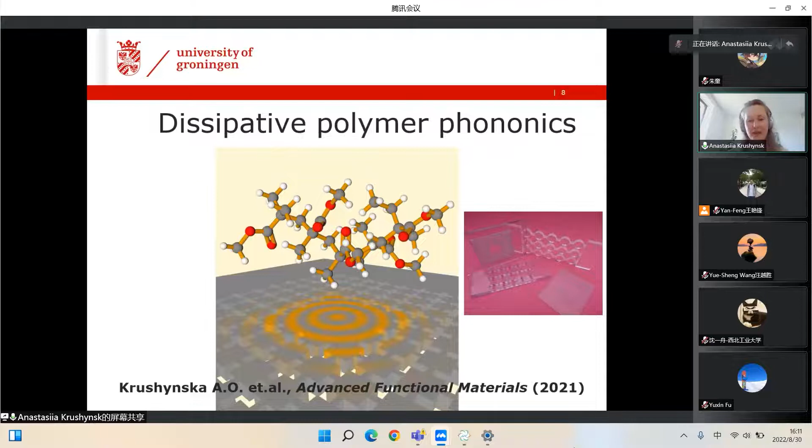Along similar settings, we also worked on the analysis of wave dissipation in 3D printed polymeric phononic structures. On this topic, we worked together with the Philips company. This company produced for us 3D printed samples, which we analyzed starting from the microstructural level, using scanning electronic microscope, then also analyzed different material characteristics, and then introduced different wave manipulation mechanisms.

So these are phononic band gaps, locally resonant band gaps, inertial amplification band gaps. We studied how the viscoelasticity of 3D printed polymers influences the wave attenuation and wave guiding properties in these materials.

Okay, after these two examples, we go to the applications, and applications in my group are currently analyzed not in the phononics field, but in the field of mechanical metamaterials. So here you see an example of the work of current PhD student Jiaoheng Zhang. He works on automated design of programmable mechanical metamaterials.

In his recently published work in APL Materials, he developed a new mechanical metamaterial configuration. So here you see an example of a metamaterial structure, which can be tuned by changing two parameters: the shape of this curve and the thickness of the elements, to perform a shape morphing functionality.

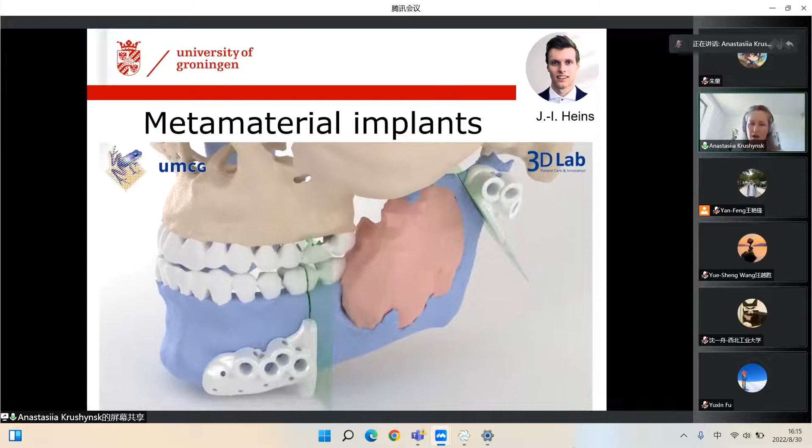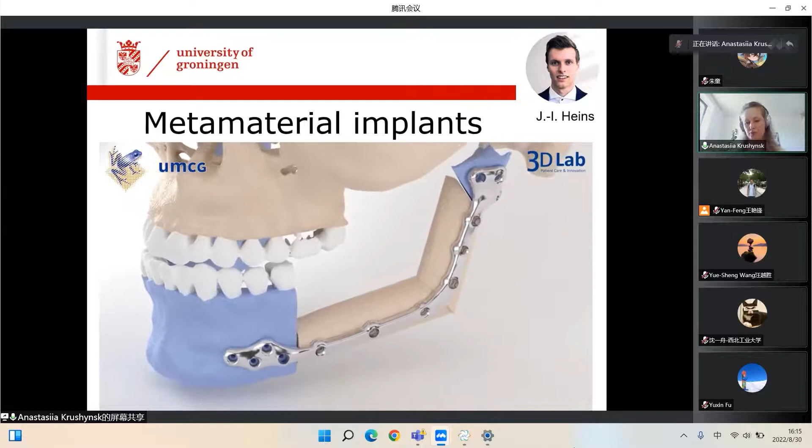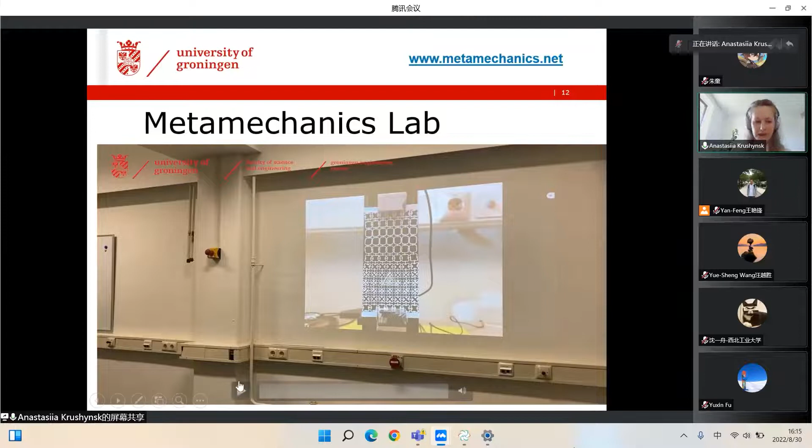Okay, so to work on this and other projects, we also have the MetaMechanics lab. Here is a short video with the setups that we have.

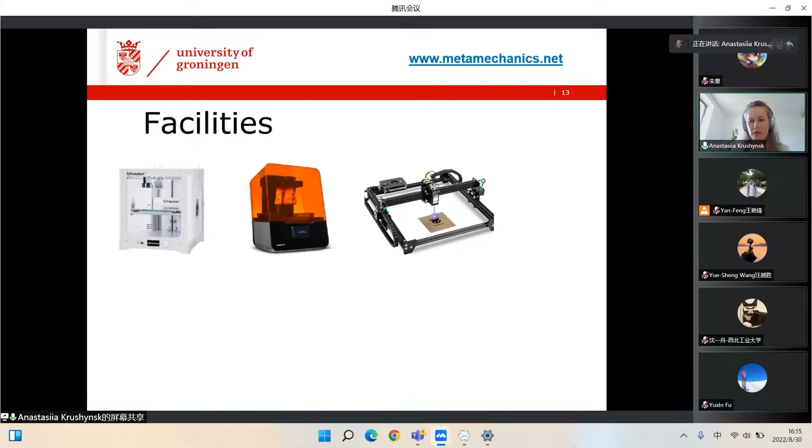Specifically, we have facilities for additive manufacturing. This is an FDM dual nozzle printer, an SLA printer. We also have a laser engraving machine. And to test the manufactured samples, we have an acoustic impedance tube and laser Doppler vibrometer with related other setups like amplifiers, transducers, accelerometers to perform ultrasonic tests.

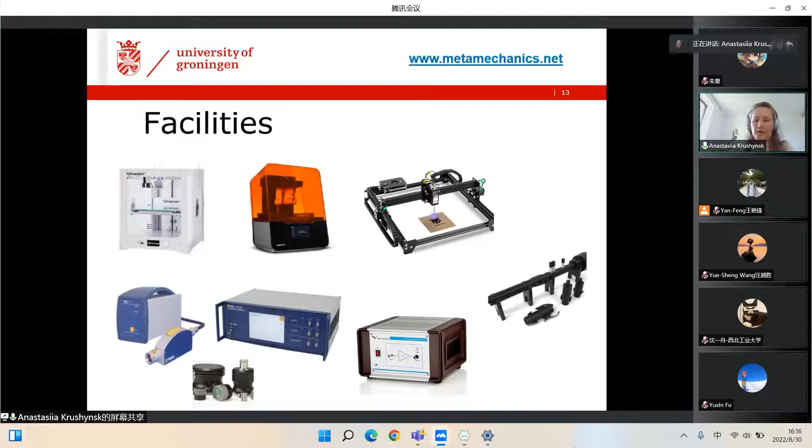To have an idea of the tests that we do, please go to our website, and we also have a YouTube channel with the same name, MetaMechanics. There you can watch videos on possible applications and the tests that we do in this lab.

Okay, so after this short introduction, I go to the main topic. These are patterned flexible wings. It's a short title, let's say, and a longer title could sound like aerodynamics and aeroacoustics of flexible artificial wings with metamaterial patterns. So this topic is not purely on mechanical metamaterials, and it's also not purely on phononic metamaterials because I would say it's on the border.

So that's application of mechanical metamaterials to the dynamics of flight. And we think that we are one of the first people who decided to study this field, which is quite challenging and requires very different expertise than my group has. So that's why it was a highly collaborative research.

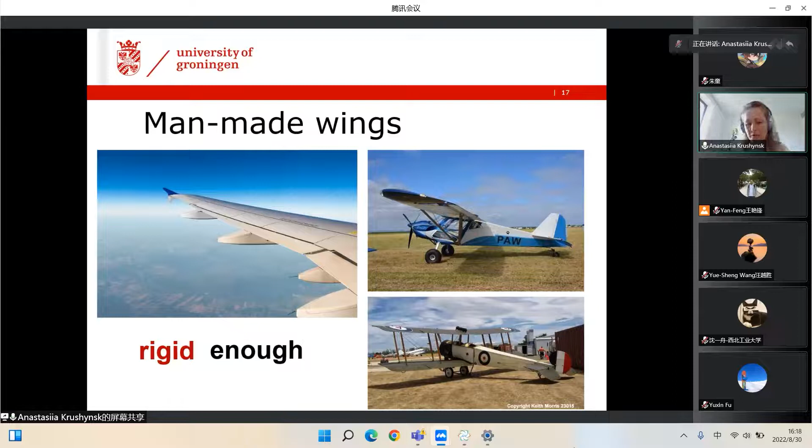However, if we have a look at natural wings, for example the wings of insects, they're quite different. First of all, they're not fully fixed. They can fold, they can rotate, they can flap. Second, they're not rigid—they're inherently flexible. And apart from being flexible, they also have a complex structure.

Just have a look at these examples, and you see that for every insect, the wings are patterned. There are rigid veins arranged in so-called optimized patterns that provide some benefits to insects, and we will discuss these benefits later.

And apart from that, wings are not only used for flight, but they're also used for communication purposes. For example, by flapping their wings, insects can communicate to each other about the presence of an enemy, or they can send a signal from female to male species. So it's inherently complex and multifunctional structures.

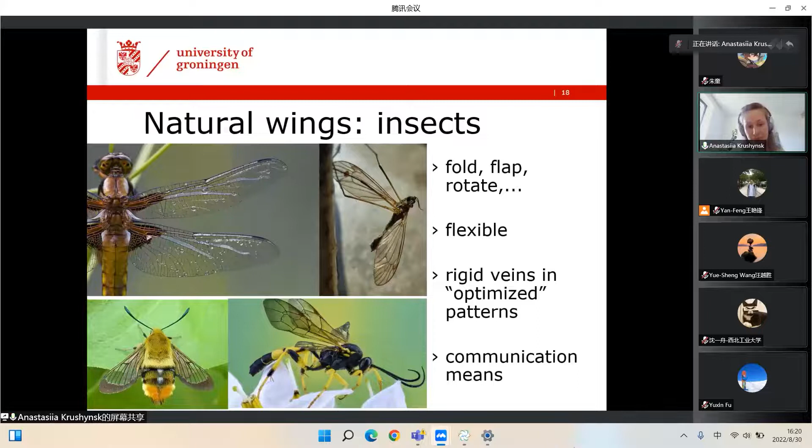Researchers have been interested in analyzing the dynamics of natural flyers like insects for quite a long time. They studied the advantages of flexible wings as compared to rigid wings, and found that having flexible wings is actually really beneficial. Why? Because it helps to save total power for insects.

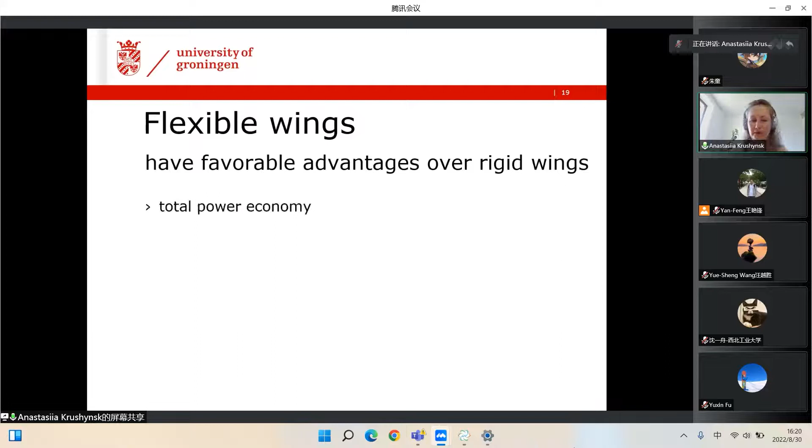Second, it enables the insects to have a high lift-to-weight ratio, meaning they can carry some weight in addition to their own. They also help introduce better control of aerodynamic characteristics during flight, and allow them to be a little bit more tolerant to wind as compared to rigid counterparts.

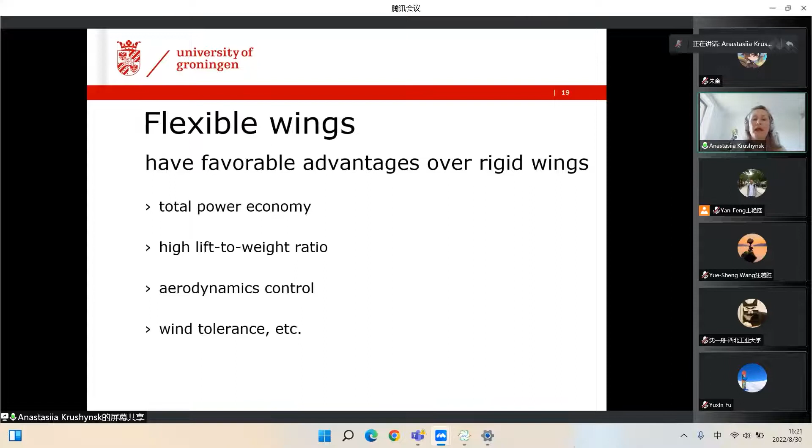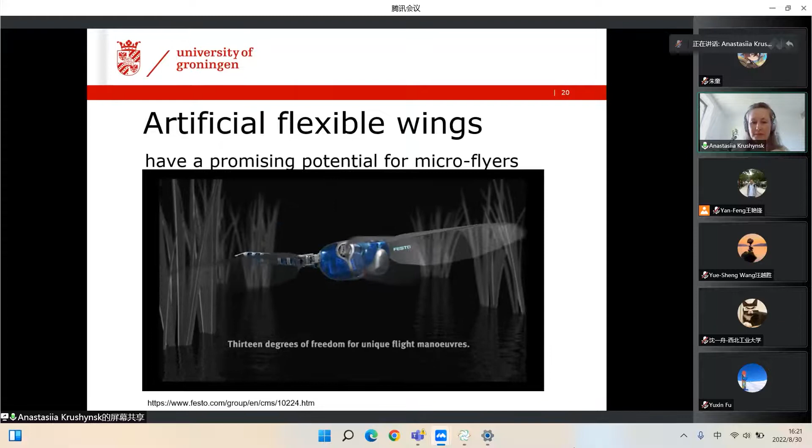So having all these advantages in mind, researchers have started to develop flying devices with flexible wings for quite a long time, and this research continues now. Here I show you my favorite example: a small flying device inspired by dragonfly wings and the dynamics of the dragonfly, fully artificial, fully mechanical.

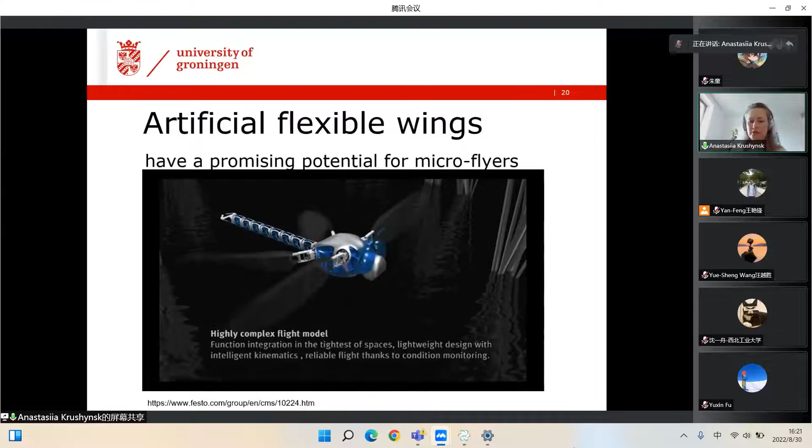You can see now as it slows down how complex the motions of these wings are—they really experience large deformations during these flaps. Besides, you see that even in this artificial setting, not speaking of natural ones, all the wings are patterned. And it appeared, after many studies, that this venation pattern is crucial for flight.

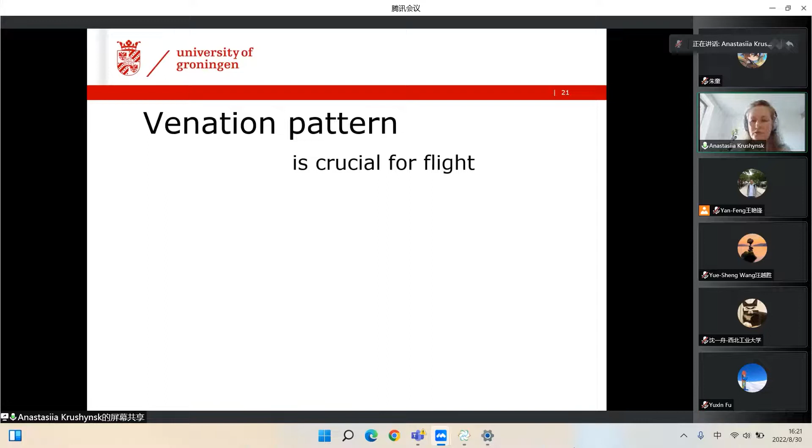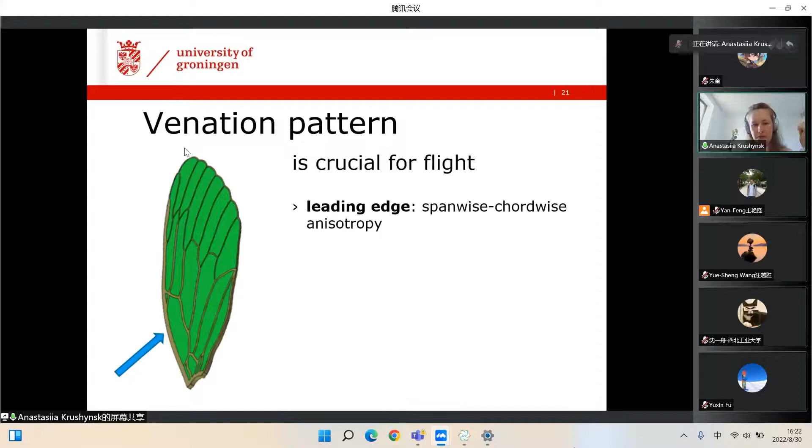Let's have a look at the model of a wing of a dragonfly. In brown, you see the venation patterns—let's discuss it a little bit. First, you can see the thickest vein, called the leading edge, which introduces, in terms of mechanical properties, anisotropy in two directions. This longer direction of the wing appears to be more reinforced as compared to the perpendicular direction.

Then smaller veins introduce so-called local flexible regions. They make the structure of the wing reinforced in certain places while it remains flexible in other places—flexible is shown in green here. After many studies, it appears that this variation in the patterns enables control of bending and torsional modes during the flight, and it's unique for every insect, and also for every specific insect. So it's quite a complex structure.

Besides, we see that the veins have varying width—they are thicker close to the base and thinner closer to the tip. That introduces variation in the stiffness and the inertial resistance of the wing, which is also beneficial for flight conditions. But overall, you see that the structure of this pattern is not simple, not only from a topological point of view, but also in terms of geometric properties. So if we want to describe it, we will really need a lot of geometric values to fully reproduce it.

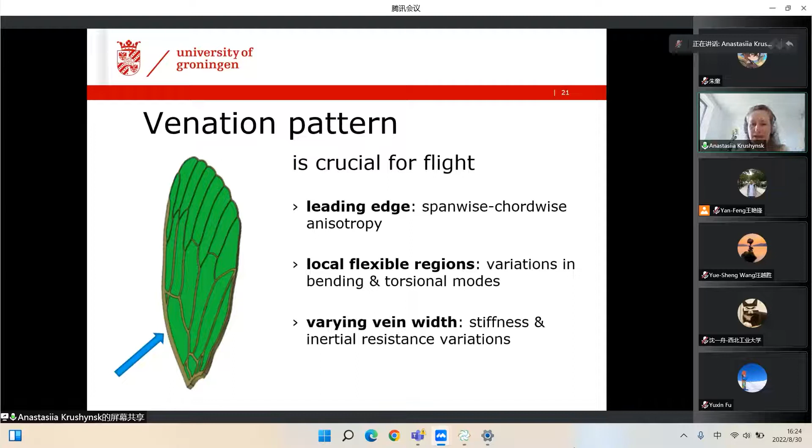And this is one of the major challenges in modeling the dynamics of these wings and reproducing it in artificial wings. So what are these challenges specifically?

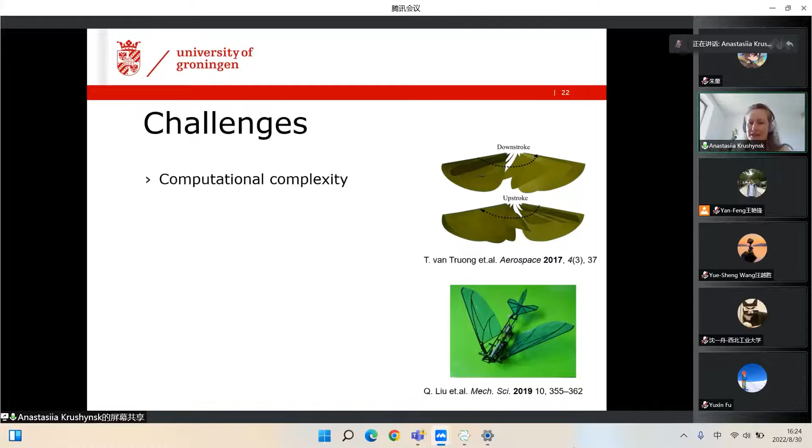That's why, to obtain first insights into the dynamics of wings, researchers try to avoid having patterns. Also, the complexity of the pattern and the difference in materials for natural and artificial wings does not allow directly translating the pattern, because it's really about the relation between material properties and the structure of the pattern. At the same time, looking at insects, we cannot find an ideal pattern, because the variability is so great that it's difficult to understand which ones perform best, or if it's even possible to find the best pattern.

The next challenge of working with artificial patterned wings is the absence or scarcity of suitable materials and technologies. Most artificial wings that try to mimic natural wings are made of very light and fragile airfoils, and there is no unique technology to make them. In most cases these are manual designs requiring a lot of time to assemble, and the fragile material means they can break very easily. Also, the very thin material used reduces load-bearing capability.

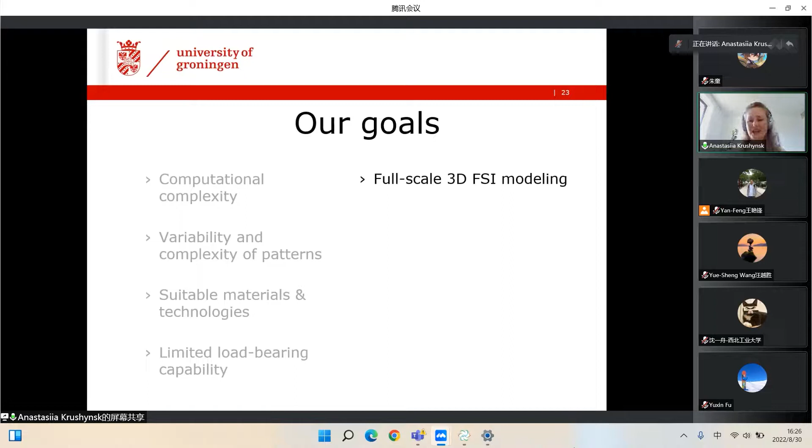So these are the challenges, and our goals were: first, not to compromise on computational complexity. We decided to perform full-scale 3D fluid-structure interaction modeling of the wing dynamics, because only in this setting can we get really useful insights into the dynamics of wings.

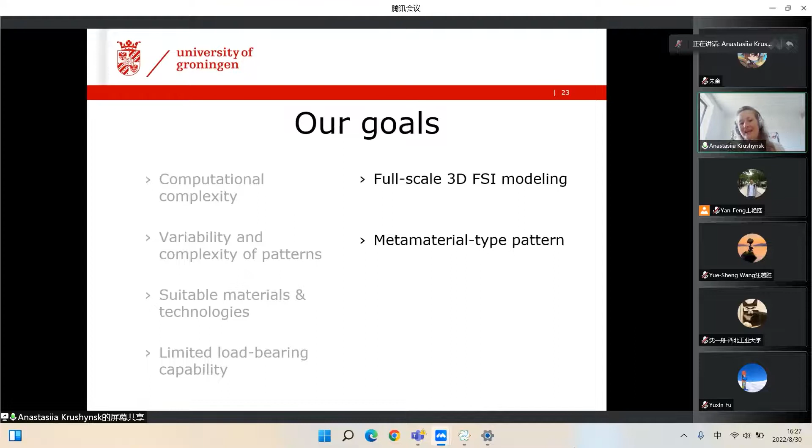Then we decided to step away from the variability of natural patterns and instead use a metamaterial-type pattern. The idea is that metamaterials typically have a few geometric parameters that allow a wide range of mechanical behavior. Having few parameters lets us study how the design of the pattern influences wing dynamics while keeping the design space sufficiently small. So this was the motivation.

To find suitable materials, we decided to explore 3D printed polymeric materials, because 3D printing becomes more and more affordable. We can print flexible materials, it's not expensive, and quite easy to do. If we can make 3D printed polymer wings easily, this may open a nice perspective for improving the design of artificial wings.

Finally, to address the limited load-bearing capability, we wanted to explore resonance flight conditions. Why resonance? Because at resonance, all characteristics are amplified, including lift. There are actually natural insects that fly long distances benefiting from resonance effects. So if it exists in nature, why not exploit this approach for artificial wings?

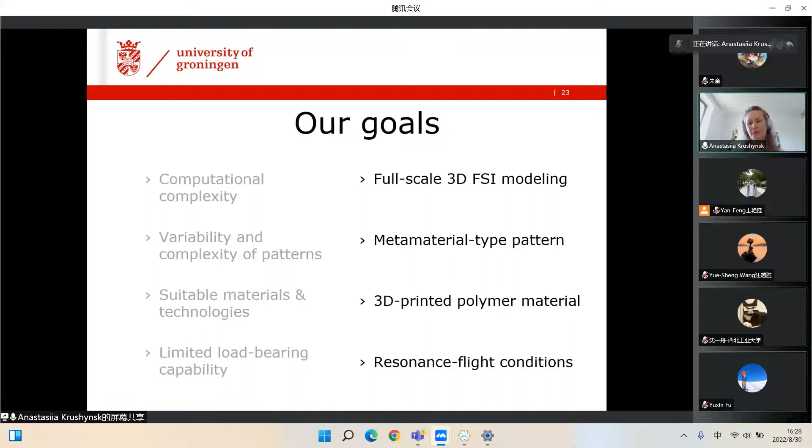So with these goals in mind, I will introduce the model that we created, how we tested it, and how we performed the modeling. And we start from the model.

Our wing model is inspired by that of a dragonfly wing. Specifically, we took the overall shape, preserving the shape and the external vein of its analogue. To keep a controllable area for the metamaterial pattern, we preserved the external wing border on all sides, so basically we cover only the interior of the wing with the metamaterial.

So in this model, we end up with 5 design parameters: the pattern area for the wing pattern, which is P, then out-of-plane and in-plane thickness of the elements. And to have a little more design freedom, we introduced scaling parameters along the X and Y axes, to be able to make this pattern anisotropic.

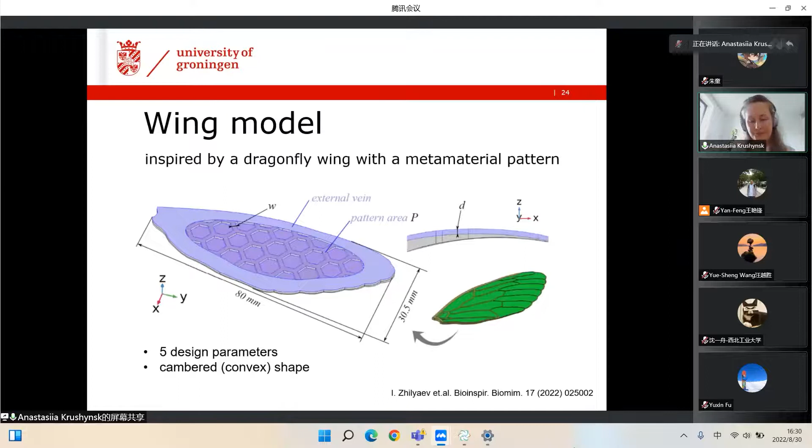Then we decided to check if it is possible to produce these wings. For that, we used a dual nozzle 3D printer and flexible TPU material made from recycled polymers, and we ended up having it printed.

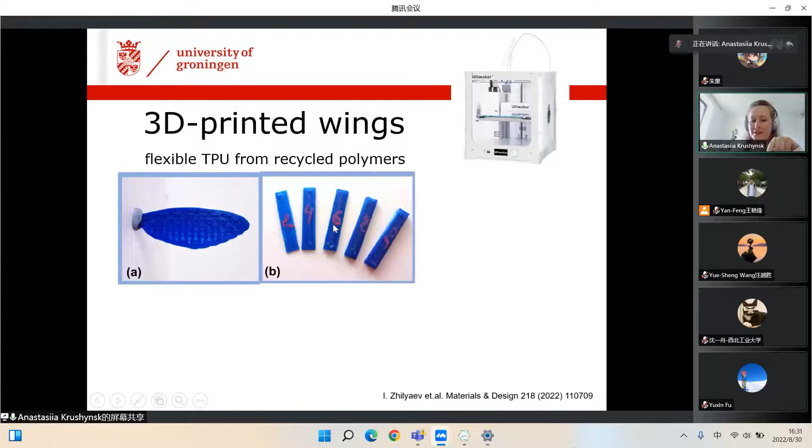To give you an idea how this flexibility works, since we're not in a real audience but online, here is a demonstration. We printed several samples with different out-of-plane thickness: the first has 2 printed layers, the next 4, and so on up to the last with 10 layers. This number of layers is used in the design of the wing.

We fix one end of the sample, and the other end is loaded with a static mass. This is not to test anything, but just to show how flexible or rigid the material can be.

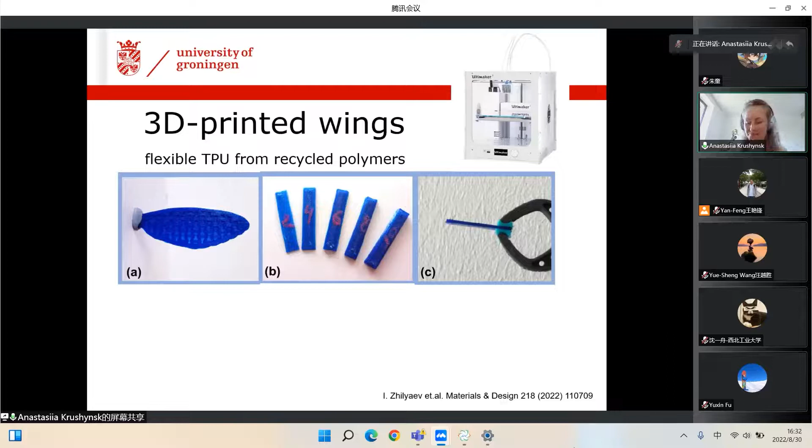With 2 printed layers, you see the material is very flexible, and at the same time it exhibits fully reversible deformations. When we remove the mass, it returns to its initial position and shape. But as the number of printed layers increases gradually, the material behaves more and more rigidly.

This allows us to make a wing model from one material, the TPU or recycled polymer, while controlling the rigidity and flexibility by changing the number of printed layers. This is something we also see in nature, because natural wings are made from a single material, chitin, which is differently arranged in the veins and in the flexible parts. We were very happy that man-made material can have analogous mechanical properties.

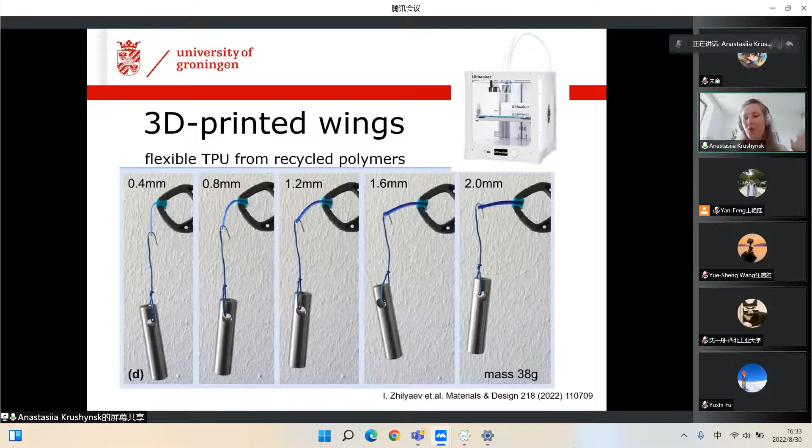Having printed these wings, we wanted to understand how accurately we can model them. This is essential because, as I said, we use a low-cost 3D printer, so the printing quality isn't very good, and it's important to know how much inaccuracy is introduced due to the manufacturing process.

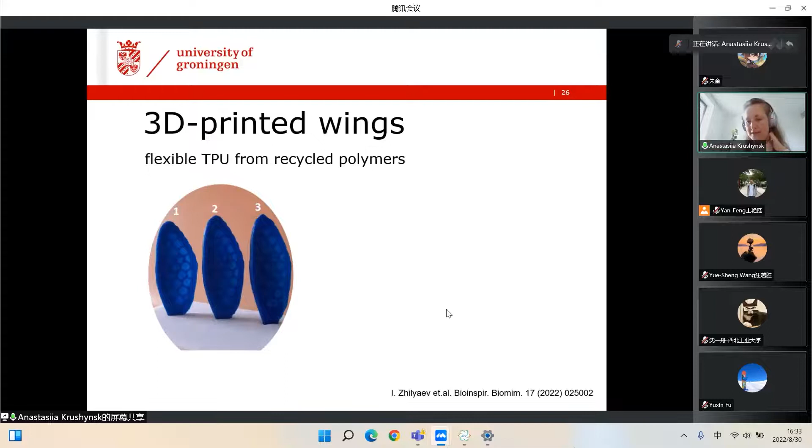For that, we tested the dynamic characteristics of the wing. Specifically, we fixed the base of the wing in a holder and excited it from one side manually with a hammer. At the other side, using a laser Doppler vibrometer, we measured the free vibrations. Basically, we hit the wing, let it vibrate, and then measure the vibration response.

We were very happy with that, and then decided to check the next property: are our wings robust enough to survive resonant type excitation?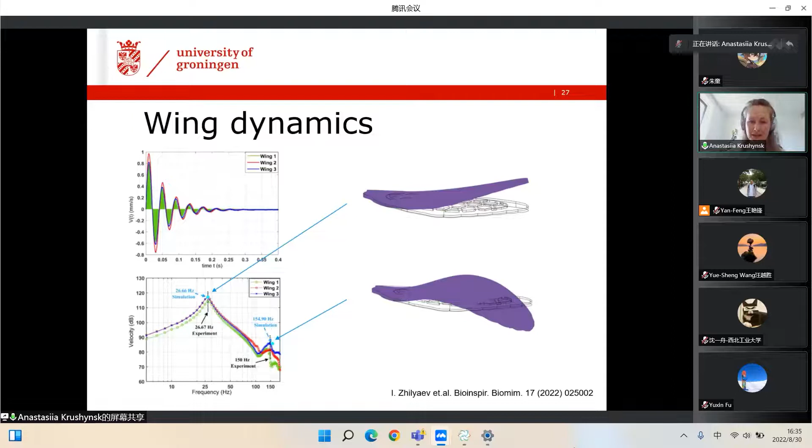For that, we used the forced excitation test. I won't run this video since you can't see it well, and I noticed when I ran it my presentation is broken, so the PowerPoint doesn't work well with this video, sorry for that. But the idea is the same.

Instead of manual excitation, we used a shaker, exciting the wing for different periods of time and measuring the forced excitation response. We excited it for 5 minutes, then the next round for 30 minutes, and then the same wing for 90 minutes. After each forced excitation experiment, we performed a free excitation experiment to check the eigenfrequency.

The idea was that if there is damage within the wing, then the eigenfrequency will change its value. But as you can see, after even 90 minutes of excitation, the eigenfrequency value is preserved. That means there are no essential internal or external damages in the wing, and in total, the excitation time exceeded 2 hours. That means the lifetime of the 3D printed wing is comparable to that typically used for microflying devices.

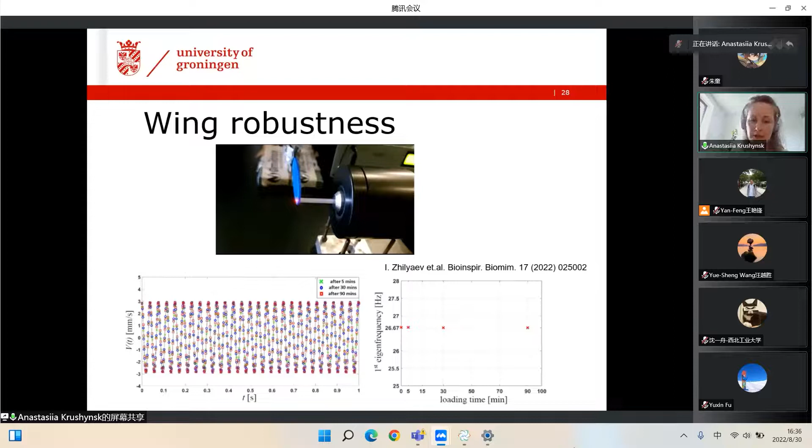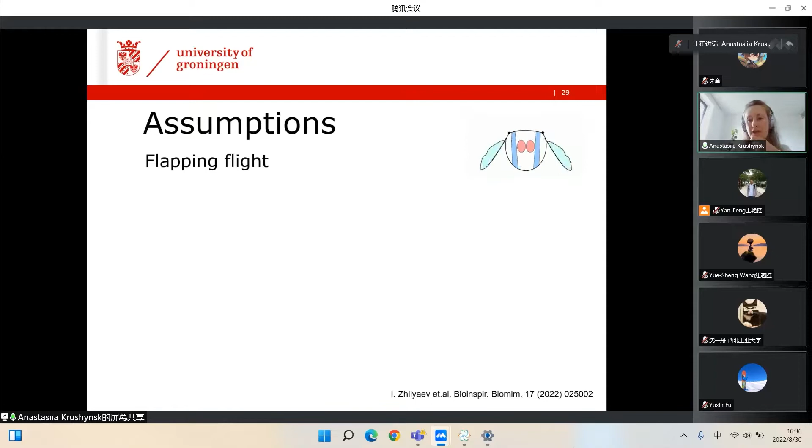So we can use these 3D printed wings in resonant type conditions and do not expect to have any damage because of that. Okay, being excited by these results, we wanted to model the wing dynamics. And for that, we chose flapping flight because it's much easier to model.

For that, we put our wing model in a half ellipse, which represents air, fixed the base, and applied a sinus loading at the bottom part of the wing, the bottom surface. And in this way, we can reproduce these dynamics, as you can see in this animation on the right-hand side.

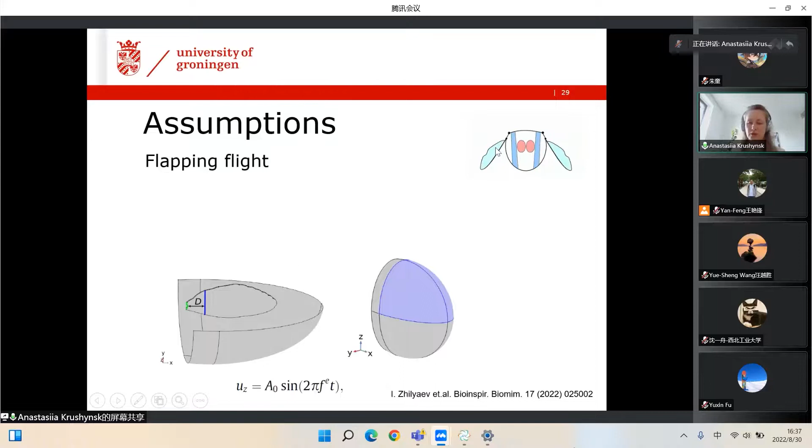We also assume zero angle of attack - this is the inclination angle of the wing to the horizontal surface. And as I mentioned previously, our wing is cambered. That means it will generate lift even despite zero angle of attack. That's why we wanted to have it cambered, to reduce the number of parameters in the model.

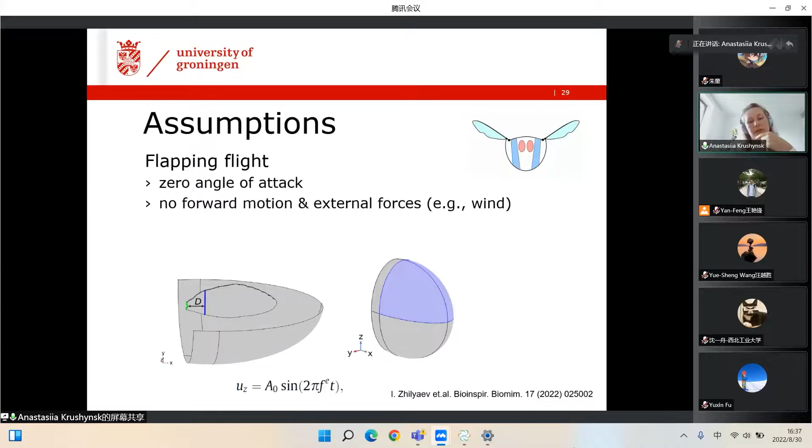Then we also did not model forward motion, did not model the influence of external forces, and also ignored the possible interactions of the wings with other parts of the flying device. These interactions might be essential, but as I said, our goal was to understand how the pattern of the wing influences its dynamics, not to build the flying device. So the assumptions used in this modeling are aimed to minimize the number of parameters so that we can fully explore how different patterns influence the wing dynamics.

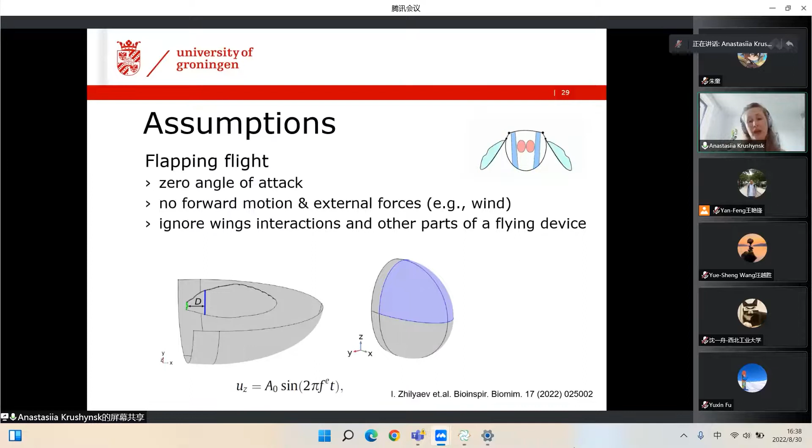So with these assumptions, we performed a transient three-dimensional air-wing interaction study using finite elements. The problem for air is described by viscous incompressible Navier-Stokes equations. So here they are. And we assumed laminar flow because the flapping frequency was low and Reynolds numbers were small.

For the wing, we used equations of motion for compressible elastic matter under large deformations. And these two domains were coupled together using the arbitrary Lagrangian Eulerian approach. I'm not going to go deep into details here. You can have a look at the paper if you're interested in how it was implemented.

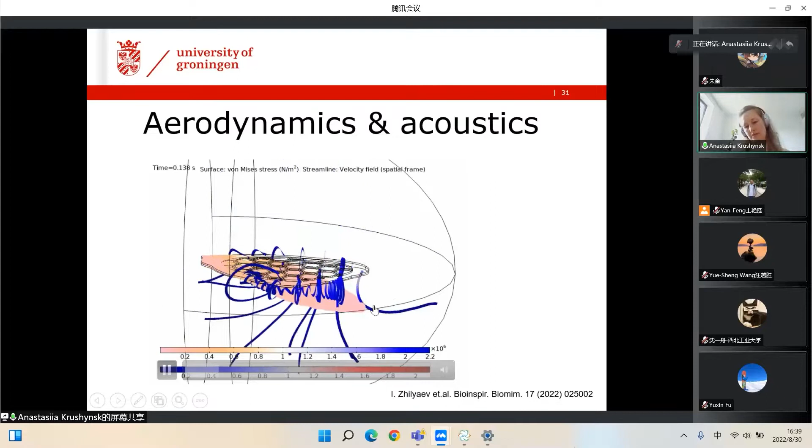And by means of this model, we were able to reproduce the flapping motion of the wing. So here you see in colors the variations of stresses in the wing material, and these blue streams show the velocity field in the air domain. Okay, so the model works.

And to analyze the influence of pattern, we need to have some characteristics which we are going to explore. For that, we introduced the so-called lift force - this is the surface-averaged pressure at the top and bottom surfaces of the wing. And we introduced the average sound generated by the wing, and defined the maximum stress in the wing material. For these three characteristics, we want maximum lift force and minimum sound and minimum stress. These are contradictory requirements, and now I'll explain why.

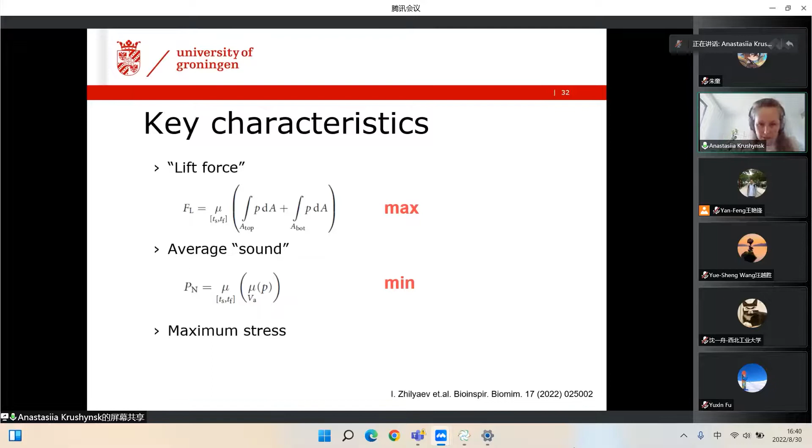And in the same way, we construct maps for our key characteristics - for lift, for noise, and for stress, for the same parameters. And you can see that as soon as the eigenfrequency is close to the excitation frequency, the lift has maximum values. So here we should look at the magnitudes, not the sign.

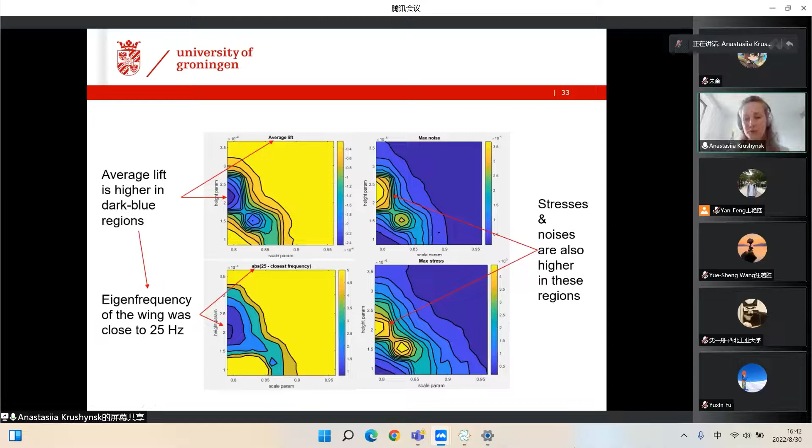So these are maximum values. And at the same time, we have maximum values of generated sound and maximum stresses. That means the closer we go to the resonance, the higher the lift, but the higher are the other characteristics. And now we want the opposite. We want to maximize lift and minimize noise and minimize stress. So that's why we have a contradiction here. To solve it, we developed a multi-parameter optimization scheme, which can be separated into 2 steps.

First, we change the parameters of the pattern to satisfy our frequency objective. Frequency objective means that we want to tune the parameters of the pattern to have the eigenfrequency of the wing as close as possible to the excitation frequency. And here you see the corresponding expression.

So for that, we solved about 1,000 problems and constructed the frequency objective map, which shows us that in the yellow region, we are at least 1 Hertz away from the excitation frequency, while in the dark blue region, we are very close, smaller than 0.1 Hertz difference to the excitation frequency, so really resonance type conditions.

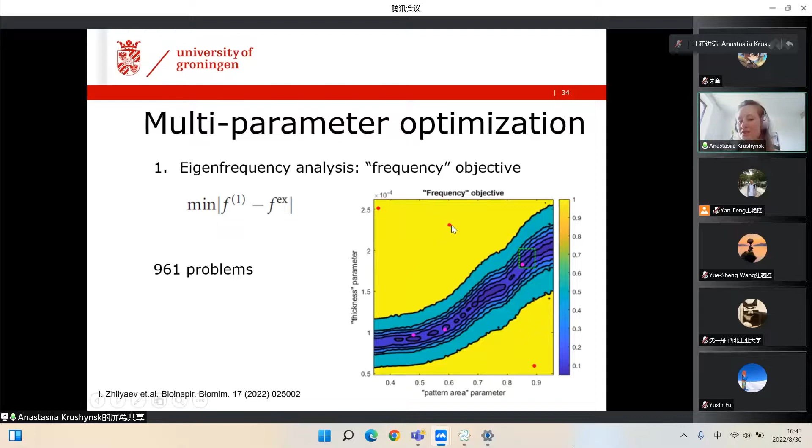So now, after having solved the first multi-parameter optimization step, we want really to tune the design parameters to maximize our lift and to minimize sound and stresses.

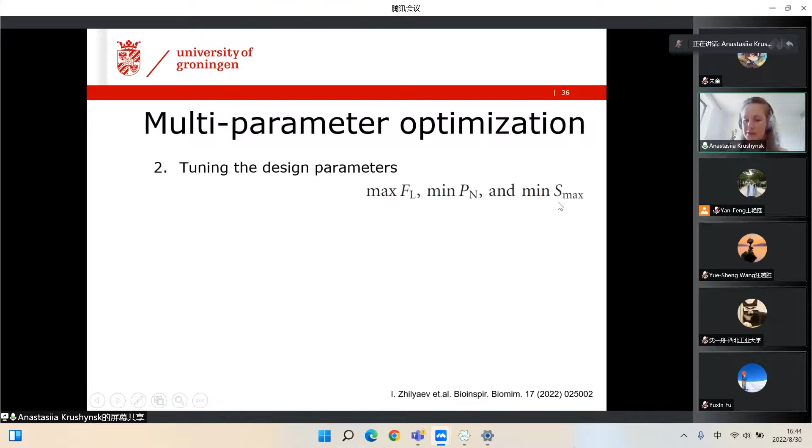For that, we use the results of the first step and focus on this small region, which is highlighted in dashed green, for which we are already close in terms of frequency to the resonance. This means that being in this region, we fix two parameters. This is thickness and pattern area, and change the other three parameters of the pattern to achieve our goals.

And within this small region, we can obtain quite different designs. So here you can see an example of 10 possible patterns, 2 of which actually satisfy the condition. So they indeed show that the lift is maximized as compared to a reference, and sound has minimum value.

These are different designs, but at the same time, they exhibit some similarities. So you can see that the honeycomb is extended along the vertical direction, so it's quite anisotropic design rather than isotropic, and this anisotropy is beneficial for our target characteristics. That means that the procedure works, and we can apply it to develop some optimized design.

So maybe not optimized in the sense, but at least to have controllable flight characteristics. At the same time, we were not very happy with that because we initially chose some parameters like thickness and pattern area for the first step, but maybe these are not the best parameters. Maybe if we choose other parameters for the design, then we could obtain better results.

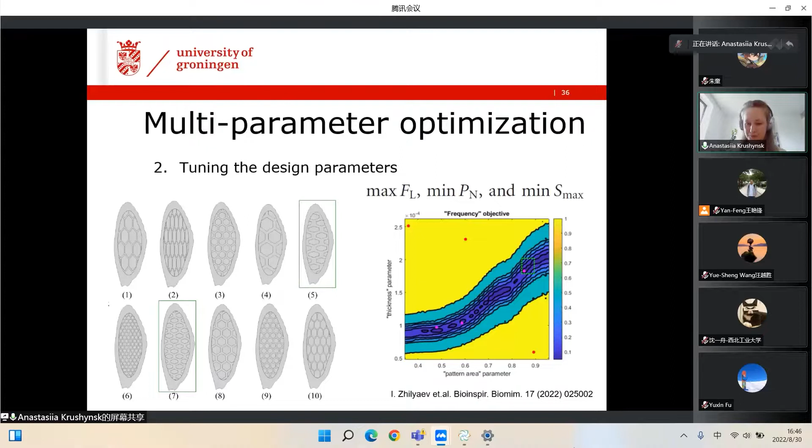So that's why there is really a need to develop a procedure which will allow us to explore the design space in full. And we did it as a next step. So having 5 parameters to describe the wing pattern, we have a 5-dimensional design space. To explore it, we use machine learning techniques.

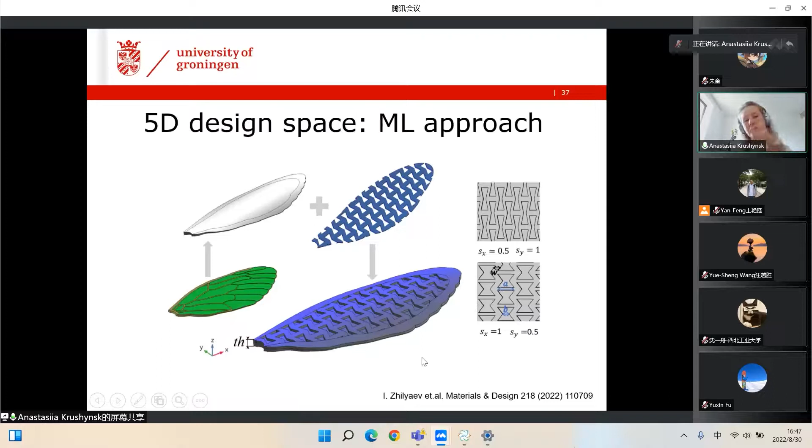So first, we extended the design to include auxetic structures too, thinking that maybe auxetic material behavior will be beneficial for flight. And also, as you can see, it's anisotropic, and we saw that some optimized designs have anisotropy along the y direction. And with this extended space, we again apply this multi-parameter optimization procedure in 2 steps.

But for each step now we use the machine learning approach. And at the first step, it appeared that the quadratic regression model performs the best. So we performed the eigenfrequency analysis, but this is not pure eigenfrequency like we analyzed the eigenfrequency of the wing, but these are eigenfrequencies of a wing which is surrounded by air.

So we calculated 200 examples and generated another 1,800 examples. The R-score appeared satisfactory, and we used this model to analyze the sensitivity of our designs to different design parameters. But here is the question: how to present the results, because we're in a 5-dimensional space, but we can read probably 2-dimensional graphs the best.

So we decided to construct 2-dimensional maps similar to those used for our previous approach. But for that, we need to somehow get rid of the dependence on the other 3 parameters. And for that, we developed so-called reduced frequency functionals. We took our functional obtained from the previous machine learning step, which depends on 5 parameters, and chose arbitrary 2 of them - for example, thickness and scaling ratio - and calculated the minimum of this functional in terms of the other 3 parameters.

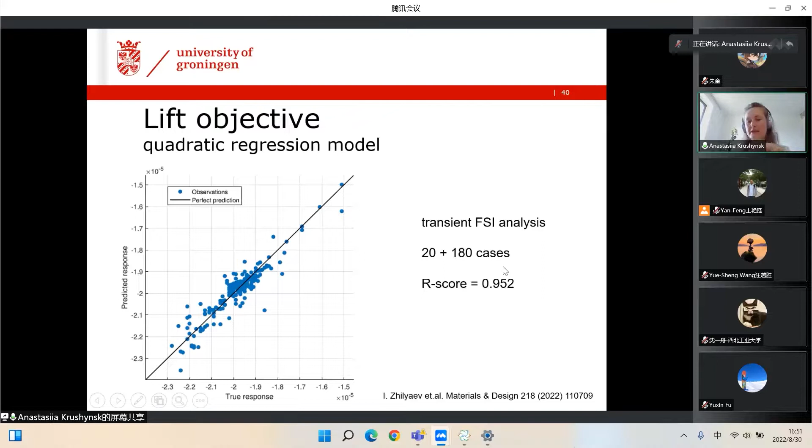And then we used a similar approach, again a quadratic regression model, to analyze the lift objective. Here we wanted to maximize the lift of the wings. For that, instead of eigenfrequency, we performed transient FSI analysis, for which we generated only 20 results, because it's very expensive to run such simulations. Then we calculated another 180 cases and fitted the model. Again, the R-score is appropriate.

And we used that model to generate similar 2D maps for reduced lift functionals this time, which give us insight about the importance of certain parameters compared to others, and also help us find configurations and the corresponding parameter values that satisfy the requirement of maximum lift. More maps and more details can be found in this paper, shown here.

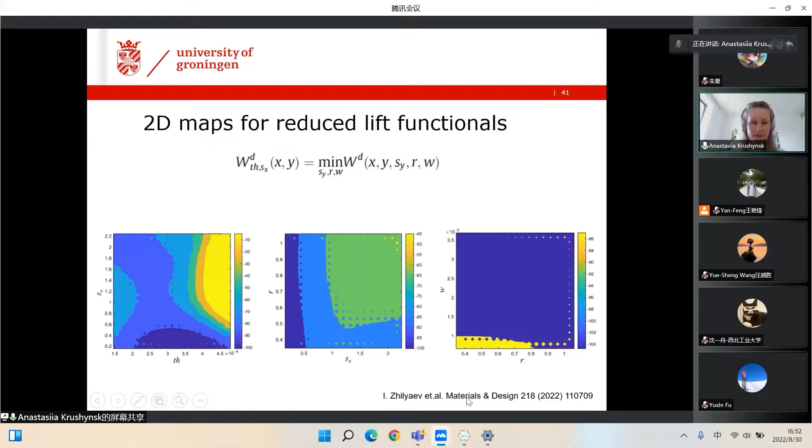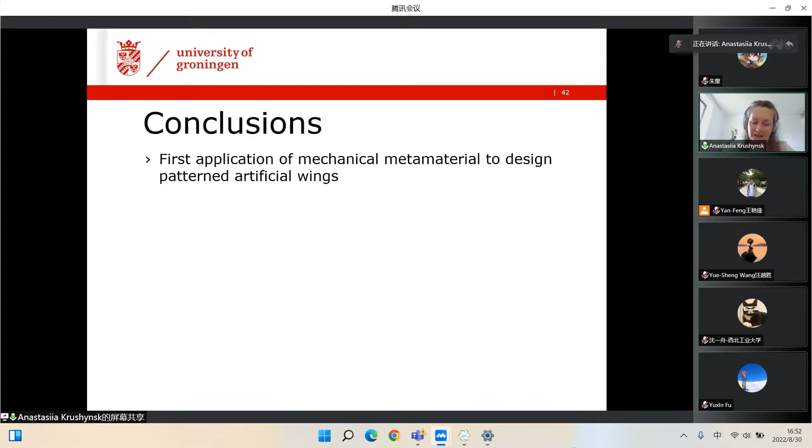Okay, and we end up with some conclusions. In this 45 minutes, I gave you one of the first applications of mechanical metamaterials to design patterned artificial wings with controllable aerodynamic and aeroacoustic characteristics. Then we showed that 3D printed polymer wings with a metamaterial pattern can be feasible solutions for resonant type flight. This is something new that was not previously explored for airfoil-based wings due to their fragility.

Then we developed a multi-parameter optimization scheme that allows us to deliver multiple design patterns to achieve the target properties. This is actually a step beyond optimization, because this approach gives the regions of parameter values, indicates the sensitivity of the parameters, and at the end we can have not a single design, but a number of designs with suitable flight characteristics. This is something similar to what we have in nature - many insects have different patterns, but they are more or less optimized for their flight. So here we achieve a similar result.

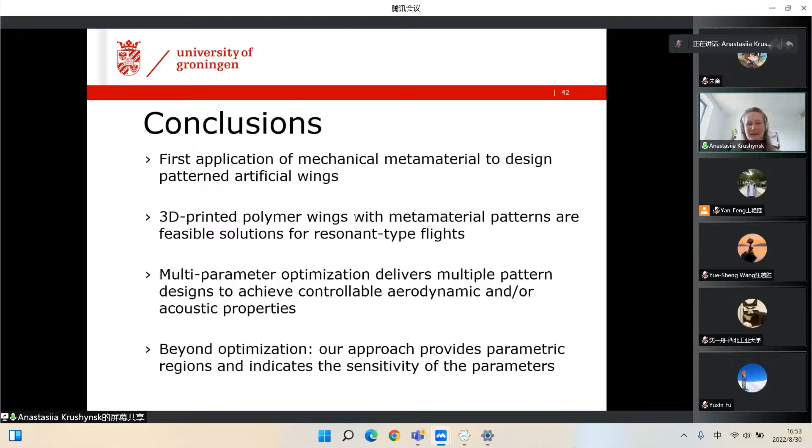And at the end, let me point you in the right direction. I do not think that flapping artificial wings are solutions for everything. That's why I do not want to advertise that we will soon have aerospace structures with flapping wings looking like this. Although these structures exist and there is a separate research direction - these devices are called ornithopters - and there are enthusiastic people developing flying devices with flexible artificial wings.

Although it's still a long way to go to have a device that can carry a person, it seems to be quite a promising research direction.

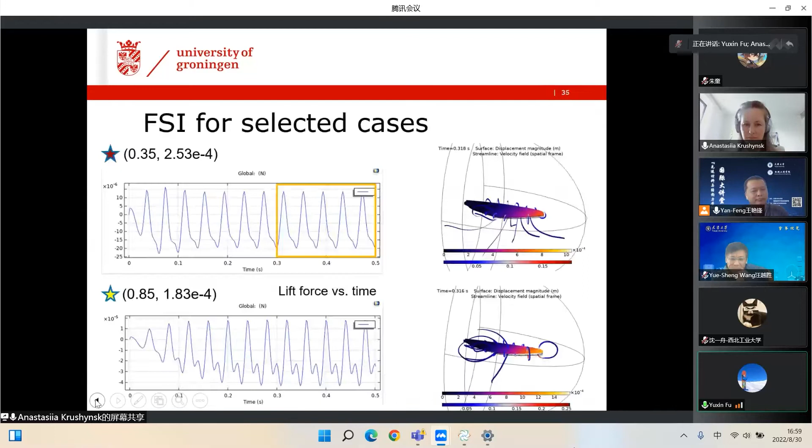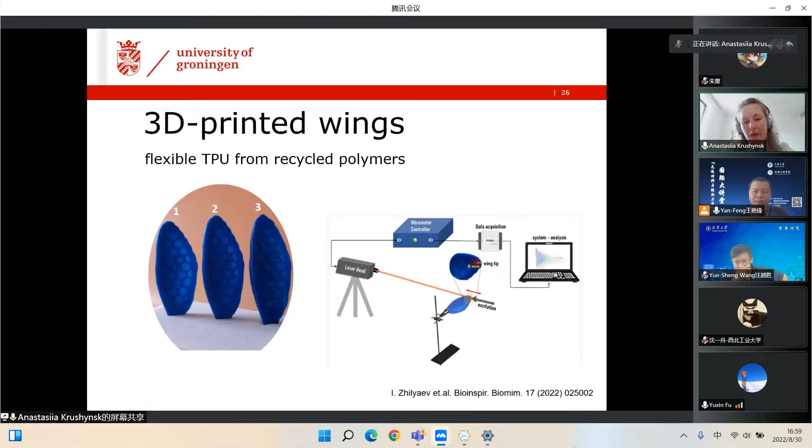However, by looking at the very nice agreement in terms of frequency for different samples, we noticed that the small defects do not influence at least the dynamic characteristics. What I think they will influence is the noise generated, because some defects on the surface of the wing introduce additional friction with air. But for that, we need to implement experimental studies for real flapping flight, and this is something we have not done yet.

Yeah, thank you. Thank you. Okay, thank you. Okay, so other questions?

I have a question. Okay.

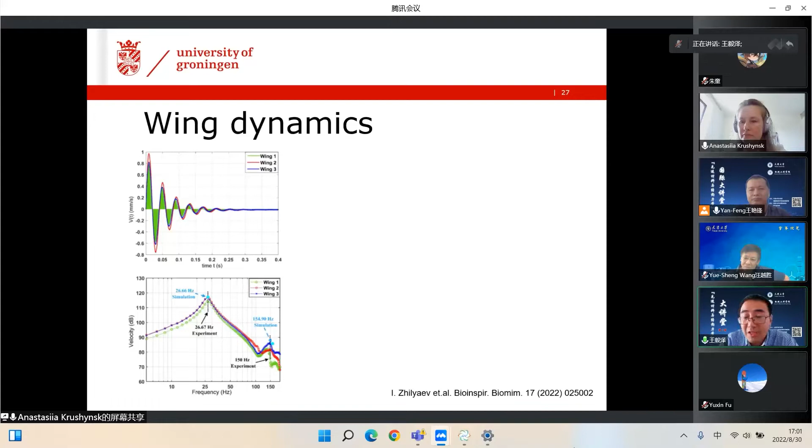I'm not sure I understood the question properly, but I'll try to answer. The choice of laminar or turbulent flow is governed by the flapping frequency. If the flapping frequency is very high, then some vorticity in the air around the wing can be observed, and we should also consider the compressibility of air. However, for the frequencies we considered, 25 hertz, this is a pretty low frequency, but at the same time it's common for many natural flyers, so it's not an unrealistic study.

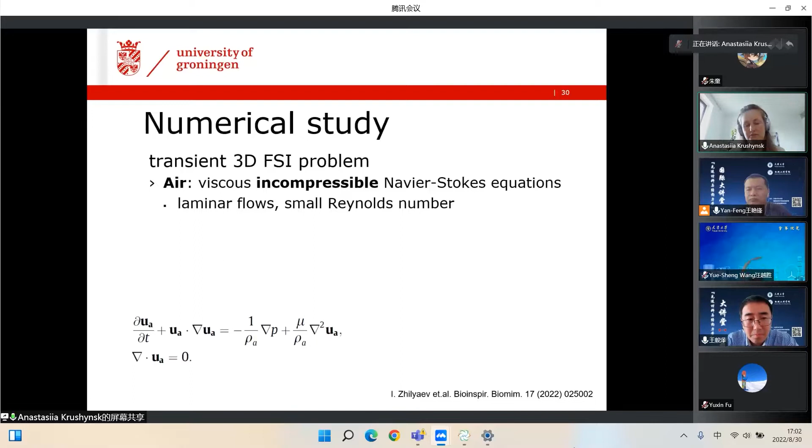It was shown that the effects of compressibility of air and created turbulence in air are very small and can be safely neglected. That's why we assumed laminar flow. And because we also do not consider forward motion of the wing, this assumption is quite valid to obtain realistic results.

Thank you, and I have another question. What numerical simulation method do you use? Have you used large eddy simulation or direct numerical simulation?

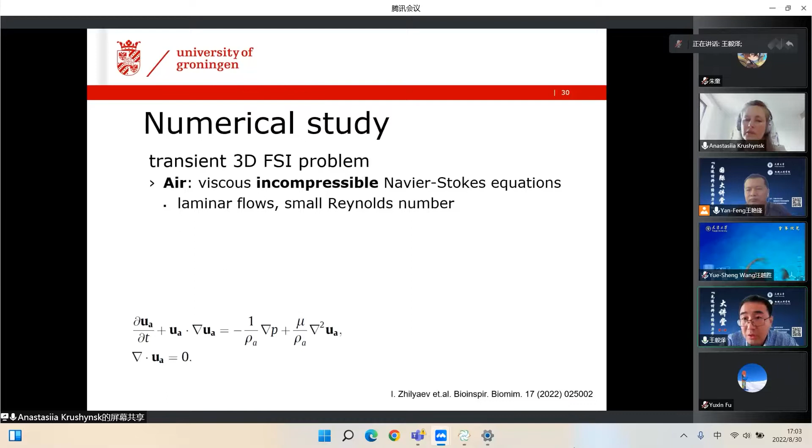Yes, we consider a fluid structure interaction problem, and within COMSOL we have a separate part specifying the dynamics of air - this is our fluid. Then a separate package simulating the motion of the wing, which, as I said, experiences large deformation. This equation describes it.

We do not neglect the large deformations that are there. We couple these two domains by introducing the already available Lagrangian-Eulerian approach in COMSOL. So we do not modify the standard settings that are there.

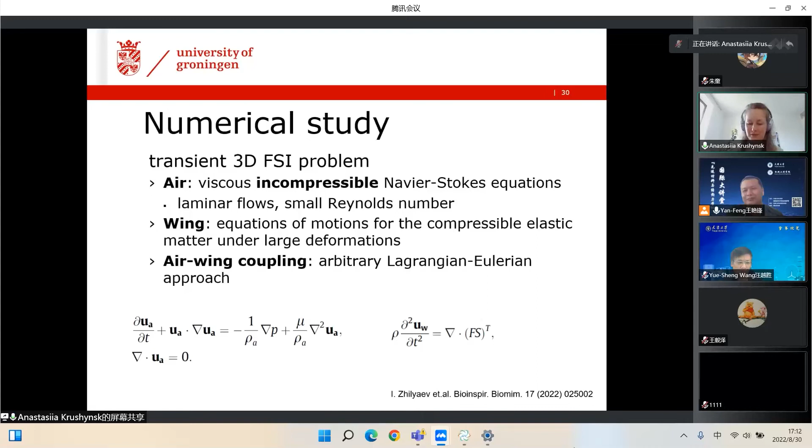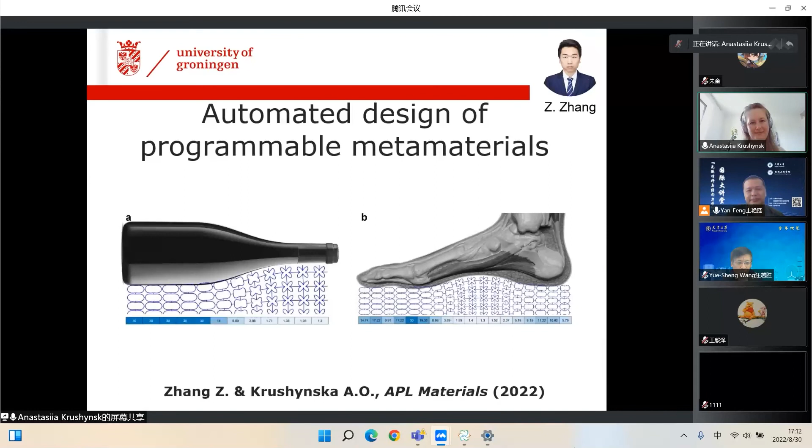So we can have, for example, in that example which I showed - just a second, I cannot go out of full screen regime, but it won't take too much time - in these structures we have variations between bulky parts and slender parts. This is also very difficult to capture when we consider viscoelastic moduli.

And for 3D printed materials, you also need to keep in mind that the behavior of the material inside the printed structure is very different from that on the surface, due to the printing conditions.

Okay. Thanks for your answers and explanations.